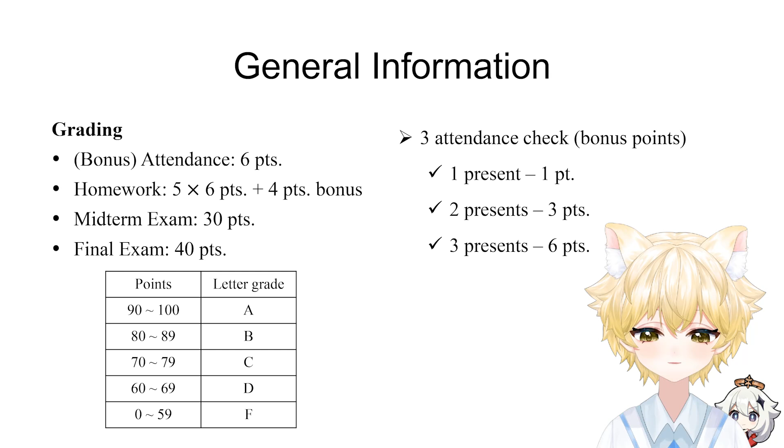Well, let me tell you. In my experience, students who attend class regularly typically perform significantly better on exams. Plus, there's valuable material we discuss in class that isn't in the textbook.

There will be 6 homework assignments, each worth 6 points. Your lowest homework grade will be dropped, meaning that effectively there are 5 assignments. The policy is designed to give you flexibility and room to improve.

Well-typed homework submission earns a 1-point bonus per assignment, up to a maximum of 4 bonus points. This is intentional. Students are expected to communicate technical work clearly and professionally, and learning to type-set equations is a valuable long-term skill.

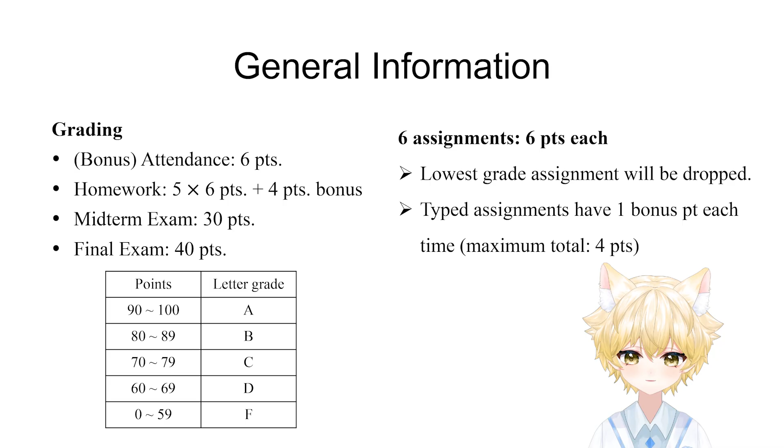There will be a midterm exam and a final exam, both in class and closed book. You are allowed 1 letter-sized equation sheet, double-sided. Copying homework solutions onto the equation sheet is prohibited. The equation sheet is meant to support understanding, not to replace your understanding.

Well, the final grades are assigned based on absolute thresholds. Although we may curve the midterm and final exam scores, the total score will not be curved. If everyone earns an A, everyone receives an A. The grading scale is transparent, and success is achievable with constant effort.

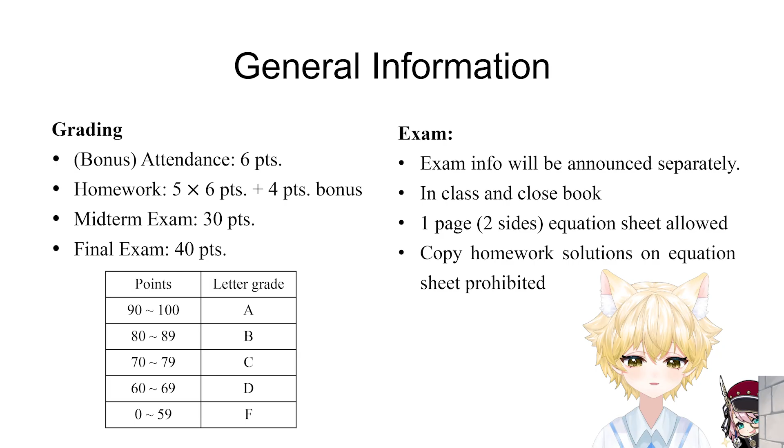You are permitted to use generative AI tools to clarify concepts, review materials, or explore alternative explanations. However, using AI to complete homework or submitting AI-generated work as your own is strictly prohibited and constitutes academic misconduct. Think of AI as a learning aid, not a decision maker. Engineering requires judgment, and judgment cannot be outsourced.

Over-reliance on AI without understanding will harm your exam performance and your ability to apply mechanics in real situations.

Before moving on, let me briefly go over the course principles, because they define how we learn and how we maintain fairness in this class.

Discussion on homework problems and lecture notes is strongly encouraged. Talking through ideas, asking questions, and helping each other understand concepts are all part of effective learning. However, the exchange of written solutions or completed work is not permitted. Your submitted work must always reflect your own understanding.

Unless prior approval is granted, late assignments will receive a 30% penalty. In addition, assignments submitted after solutions have been posted will not be accepted. Also, unless approval is granted, no makeup exams will be given. Exams are designed to assess individual understanding at a specific point in time, and maintaining uniform conditions is essential.

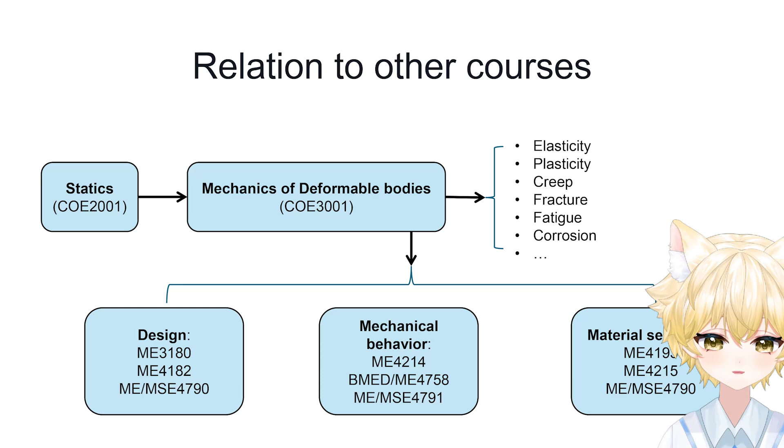COE 3001 sits between statics and more advanced courses such as machine design, elasticity, plasticity, fracture mechanics, and fatigue. Statics taught you how to compute forces. This course teaches you how those forces deform materials. Later courses will build on this foundation to study more complex material behavior and failure mechanisms.

The structure of this course follows a deliberate progression. We begin with axial members, or bars, subject to tension and compression. These problems are conceptually simple and allow us to introduce stress, strain, and constitutive relations. We then move to shafts under torsion, where rotational deformation becomes important. Next, we study beams under bending, which form the backbone of most structural systems. Finally, we examine columns and buckling, where stability rather than strength governs failure.

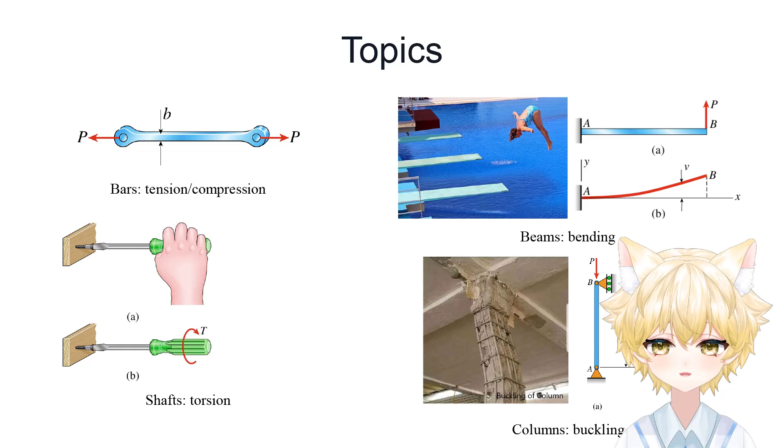The course starts with basic deformation modes such as tension, compression, shear, bending, and torsion. From there, we learn how to compute the internal forces inside a structure, and then translate these internal forces into stresses. Once we understand stress, the course naturally branches into three major directions.

One branch focuses on strength, asking whether a structure will fail. Another focuses on stiffness, asking whether the deformation is acceptable. The third focuses on stability, asking whether the structure can suddenly lose equilibrium, such as through buckling.

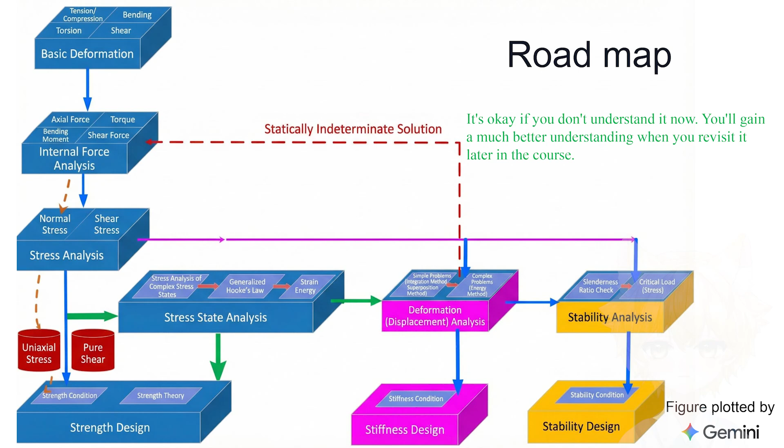Although the topics in the course are connected, some problems can be solved using simple methods early on, while others require more advanced tools that we will develop later. That is why you may see arrows that go forward then come back. For now, you should think of this figure as a map, not a checklist. As we move through the semester, we will revisit this diagram many times, and each time more of it will start to make sense.

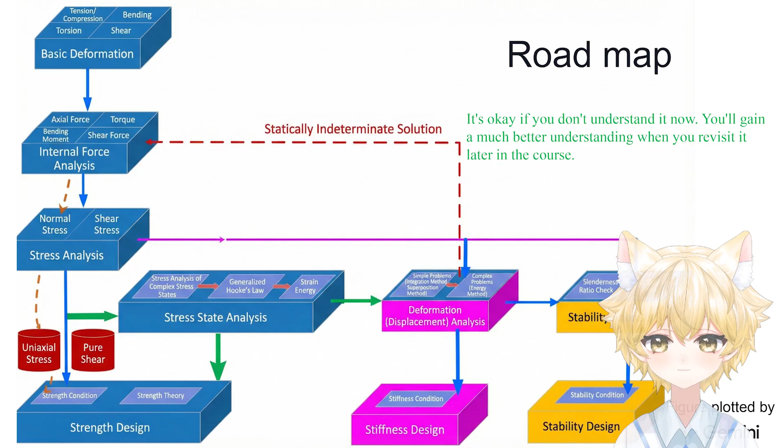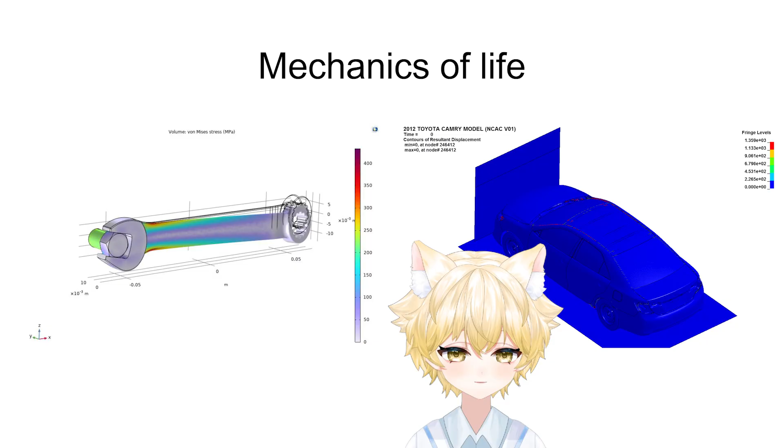Towards the very end of the course, we will briefly introduce commercial engineering software, just to give you a first impression of a numerical simulation in practice. The images on these slides are examples of what such software can do - for example, predicting stress distributions, deformation, and overall structural response in real components and full systems. The purpose is simply to help you connect what you learn analytically in this class with how mechanics is applied in real engineering workflows. Think of this as a preview, not a requirement. For now, we will move on and focus on the fundamentals.

The mechanics of materials is the hidden backbone of civilization. I want to share some stories that illustrate the critical importance of mechanics and materials.

The Saturn V rocket, which carried astronauts to the moon, experienced enormous mechanical loads. Its structure endured compression from its own weight, tension from engine thrust, bending from aerodynamic forces, and torsion from control systems. The primary challenge was not material strength alone, but structural stiffness and stability. Thin-walled shells had to be light enough to fly, yet stiff enough to avoid buckling.

At the opposite extreme is the bathyscaphe Trieste, which descended to the deepest point in the ocean.

Its spherical steel pressure hull was designed to withstand approximately 110 megapascals of external water pressure. The spherical geometry ensured uniform compressive stress, demonstrating how geometry can be just as important as material selection.

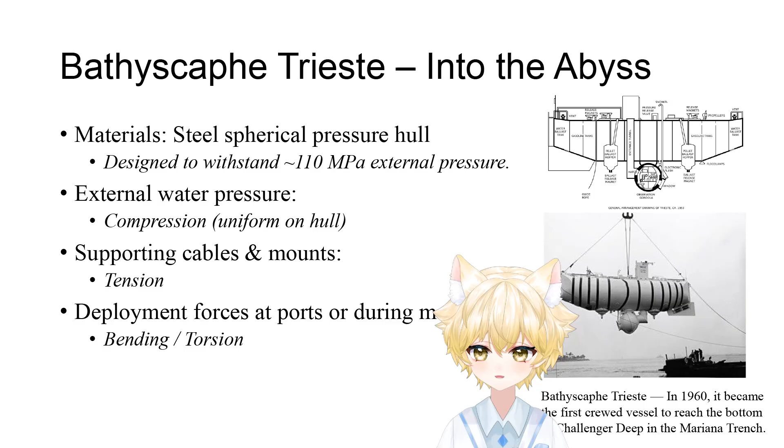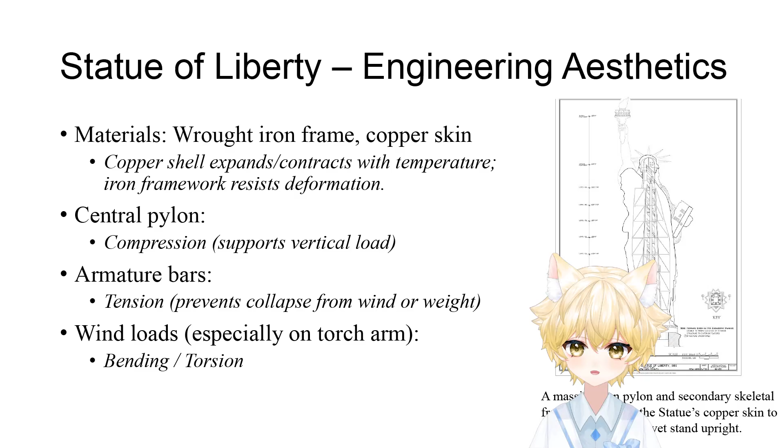The Statue of Liberty presents another fascinating case. Its wrought iron frame supports the copper skin. Here's the clever part: the copper shell expands and contracts with temperature changes, while the iron framework resists deformation. The central pylon handles compression. To support the vertical load, armature bars provide tension to prevent collapse from wind or weight, and the wind loads, especially on the torch arm, create bending and torsion forces. This engineering solution allows the copper skin to move independently while keeping the statue standing upright. Without understanding these deformation principles, Lady Liberty might have collapsed long ago.

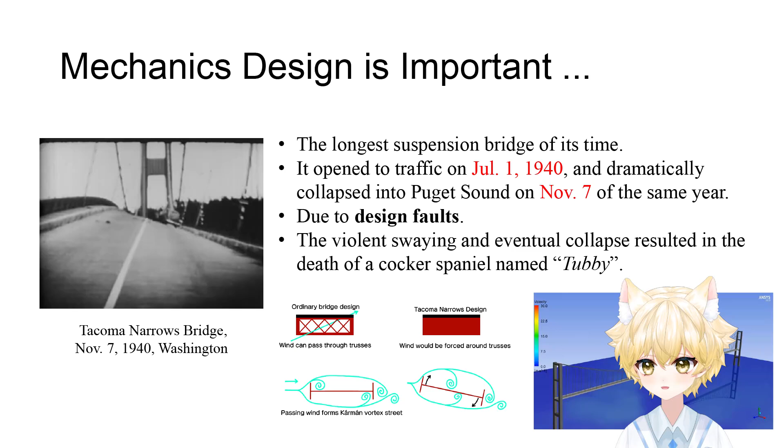Now let's look at what happens when we get it wrong. The Tacoma Narrows Bridge, which opened on July 1, 1940, dramatically collapsed into Puget Sound just 4 months later on November 7th. At the time, it was the longest suspension bridge of its time. The collapse resulted from design faults that didn't properly account for aerodynamic forces and the bridge's natural frequency. The violent swaying and eventual collapse tragically resulted in the death of a Cocker Spaniel named Tubby. This incident revolutionized bridge design and taught engineers critical lessons about resonance and structural dynamics.

Similarly, Aloha Airlines Flight 243 in 1988 suffered catastrophic failure due to fatigue cracks and poor maintenance. A large section of the roof tore off mid-flight, consisting of the entire top half of the aircraft skin from behind the cockpit to the fore-wing area. This explosive decompression resulted in one fatality, flight attendant Clarabelle C.B. Lansing, who was ejected from the plane, and injured 65 others. This tragedy highlighted the importance of understanding fatigue failure in materials.

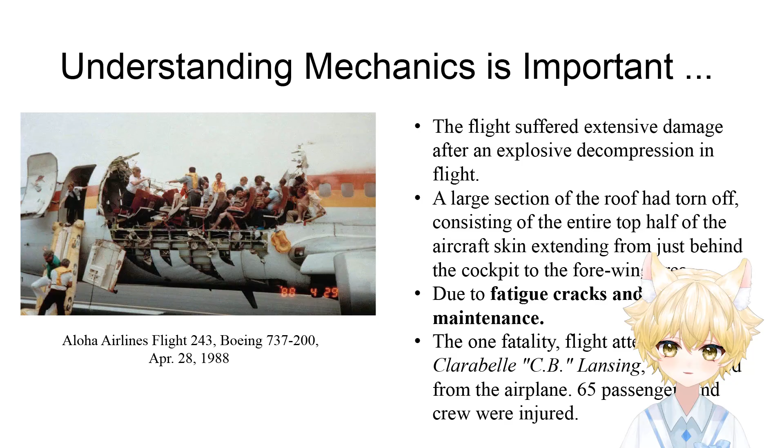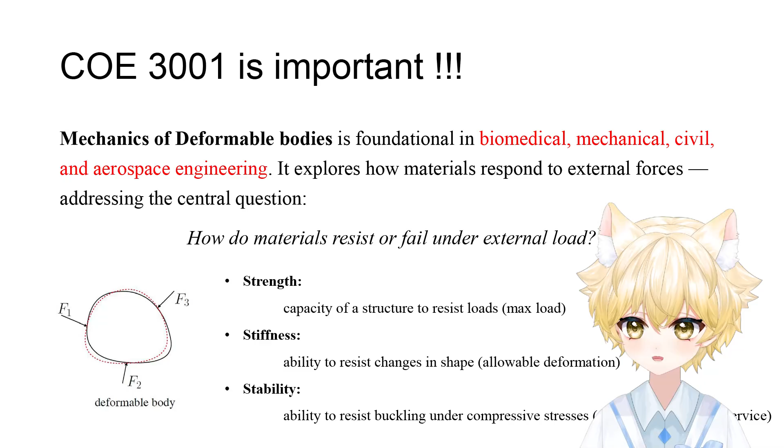These examples aren't just history lessons. They are powerful reminders of why COE 3001 matters. Mechanics of deformable bodies is foundational across biomedical, mechanical, civil, and aerospace engineering. It explores how materials respond to external forces, addressing the central question: how do materials resist or fail under external load? This brings us back to the three critical properties of this course: strength, the capacity of a structure to resist loads; stiffness, the ability to resist changes in shape; stability, the ability to resist buckling under compressive stresses.

Now let's get into the technical part of our course. In statics, you worked primarily with rigid bodies, but in the real world everything deforms under load. That's where deformable bodies comes in. A rigid body is an idealized model. It is assumed to sustain unbounded load without any changes in shape or size. No matter how large the applied forces are, the geometry of the body remains unchanged. Because of this assumption, rigid body mechanics focus only on overall loading, kinematics, and dynamics, without concern for internal deformation. This is the framework you primarily used in COE 2001, statics.

In contrast, a deformable body is a more realistic representation of real materials. For deformable bodies, an upper bound on load exists. When forces are applied, the body experiences change in shape and size. These deformations may be small or large, but they cannot be ignored. As a result, deformable body mechanics cares not only about equilibrium, but also about how the structure deforms during or due to loading.

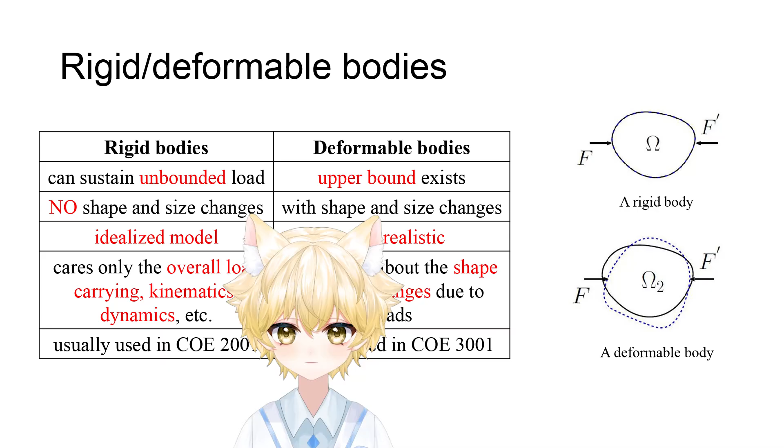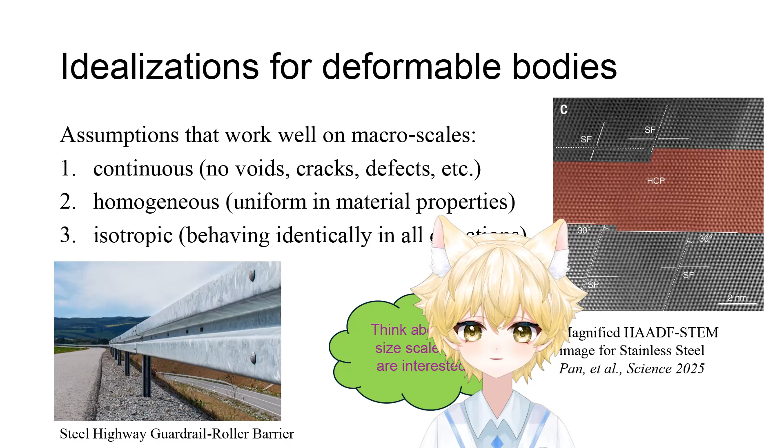To analyze deformable bodies, we rely on several idealizations that work well at the macroscopic scale. First, we assume materials are continuous, meaning we ignore voids, cracks, and defects. Second, we assume materials are homogeneous, with uniform properties throughout the body. Third, we often assume materials are isotropic, behaving identically in all directions. These assumptions are not strictly true at the microscopic or atomic scale, as shown in the image on the right. However, when we study engineering scale structures such as beams and columns, this idealization provides accurate and practical results. The key idea is to always think about the length scale you are interested in. At the scale of this course, these assumptions are both reasonable and extremely useful.

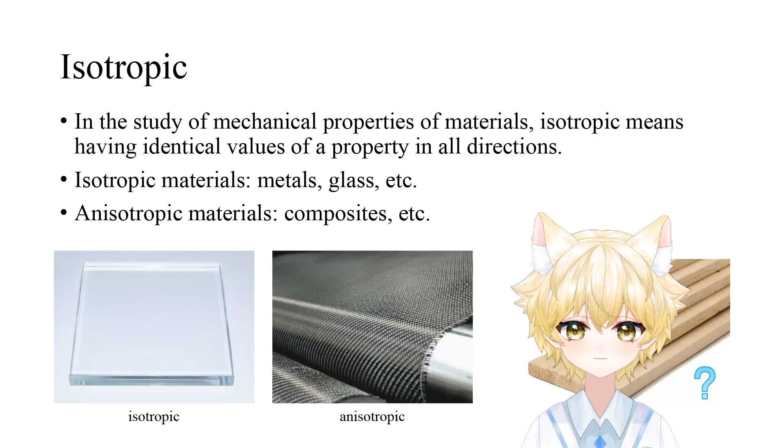Before we can analyze deformations, we need a common language, and the language is mathematics. Let's review some fundamental concepts. First, units. In this course, we will use SI units consistently. That means length is measured in meters, mass in kilograms, force in newtons, moments in newton meters, and energy in joules. You may be familiar with US customary units from previous courses, but for this class, all analysis and final answers are recommended to be expressed in SI units. Using a single, consistent unit system helps avoid mistakes and makes equations easier to interpret. Unit conversion is your responsibility, so please pay close attention to units throughout your calculations.

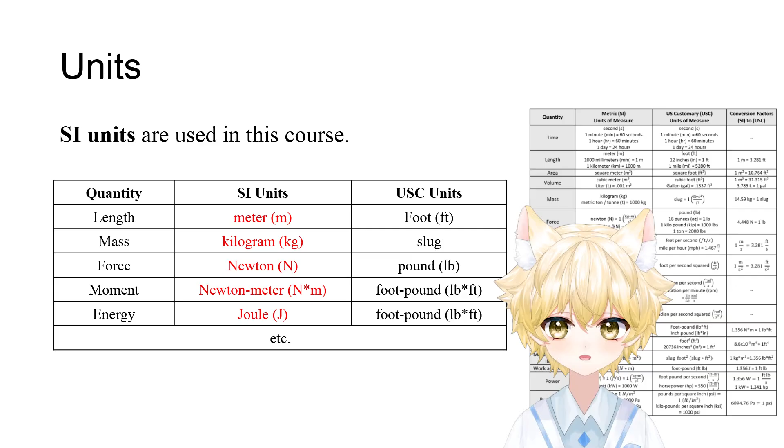Because real engineering loads are either very huge or very small, we rarely talk in original SI units. We use prefixes, and you need to be fluent in them. Based on my experience, rounding prefixes during calculation can lead to serious errors in the results, especially when dealing with square roots.

Here are some examples. Kilo, that is 10 to the power of 3. We often measure force in kilonewtons, right? Second, mega, the capital M, that is 10 to the power of 6. This is standard for stress. If you calculate stress, it will most always be in megapascal.

The third one, giga, the capital G, right? This is 10 to the power of 9. This is huge. We usually use this for modulus because metals are incredibly stiff. Here is my advice: always pay attention to prefixes, because a small mistake can lead to errors of several orders of magnitude.

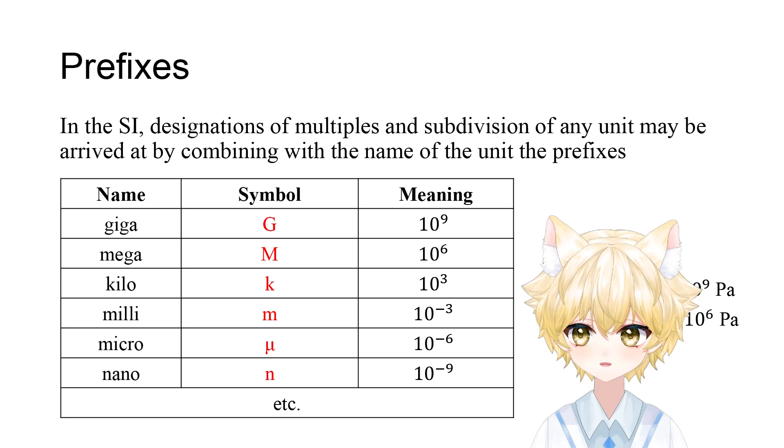Okay, then we go to scalars and vectors. A scalar is a quantity that has magnitude only. Examples include mass, time, temperature, and energy. Scalars do not have a direction, so they can be described by a single number with units.

A vector, on the other hand, has both magnitude and direction. Common examples in mechanics include force, velocity, displacement, and acceleration. Because direction matters, vectors cannot be treated as ordinary numbers. Vectors are often expressed in component form, such as using i and j in 2 dimensions. Vector addition is performed by adding components, which corresponds to placing 2 vectors head to tail connected.

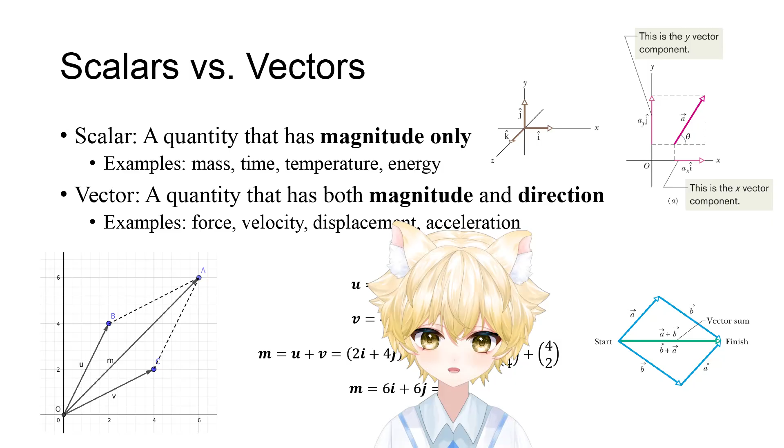Throughout this course, we will work extensively with vectors, since most mechanical quantities depend not only on how large they are, but also on the direction in which they act. For example, the most common one is force, right? We always care about the direction of force. Understanding vector operations is essential for our work.

In mechanics, there are 2 common ways to multiply vectors, the dot product and the cross product. The dot product measures how much one vector acts along the direction of another. It is defined as A dot B equals AB cosine phi, which can be interpreted as the magnitude of A projected onto B, multiplied by the magnitude of B. In component form, the dot product is simply the sum of the products of corresponding components.

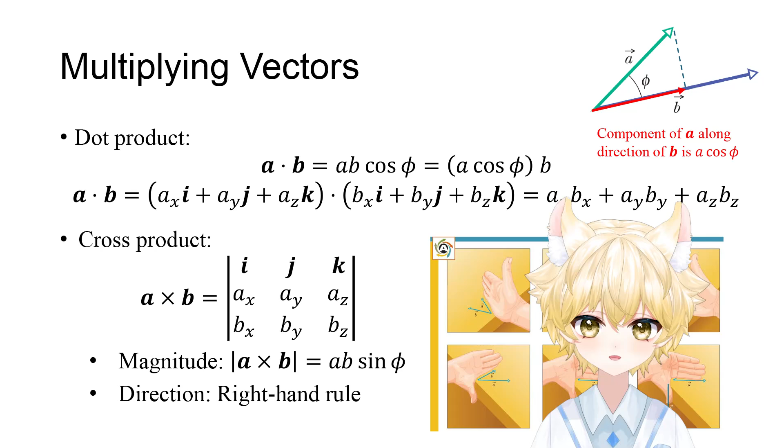The cross product, in contrast, produces a new vector that is perpendicular to both input vectors. Its magnitude is AB sine phi, and the direction is determined by the right-hand rule. In this course, the dot product is commonly used to compute components of force and stresses, while the cross product is essential for analyzing moments and torques.

In mechanics of deformable bodies, derivatives and differential equations are essential tools, not abstract mathematics. A derivative describes a rate of change. Geometrically, it represents the slope of a curve. Physically, it tells us how a quantity varies with position or time.

For example, in structural mechanics, derivatives of displacement describe slope, curvature, and strain. When we analyze real structures, quantities such as stress, strain, and displacement vary continuously along a body. This naturally leads to differential equations, which relate external loads to internal response. Most problems in this course are boundary value problems, where conditions are specified at supports or boundaries, rather than at a single point. Understanding derivatives and differential equations allows us to connect loads, material properties, and geometry to the resulting deformation.

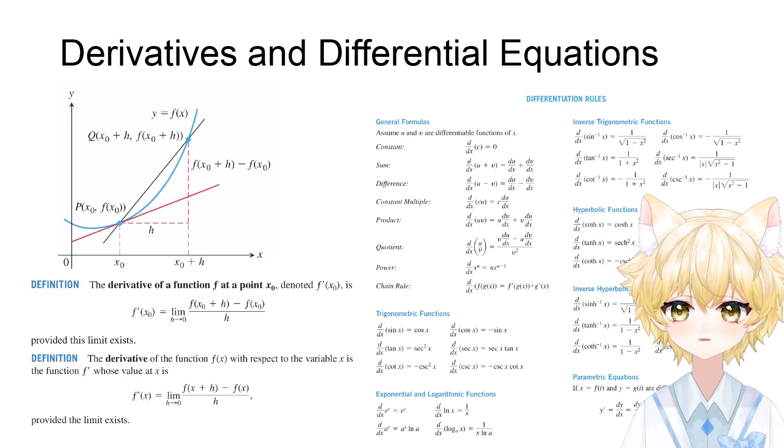You don't need to memorize every formula on these slides. What matters is recognizing that calculus is the language we use to describe how structures deform. Here is a simple reminder of what we mean by a differential equation. A first-order differential equation relates a function to its first derivative, usually written as dy/dx equals f(x,y), right? You may also see this written as y prime equals f(x,y).

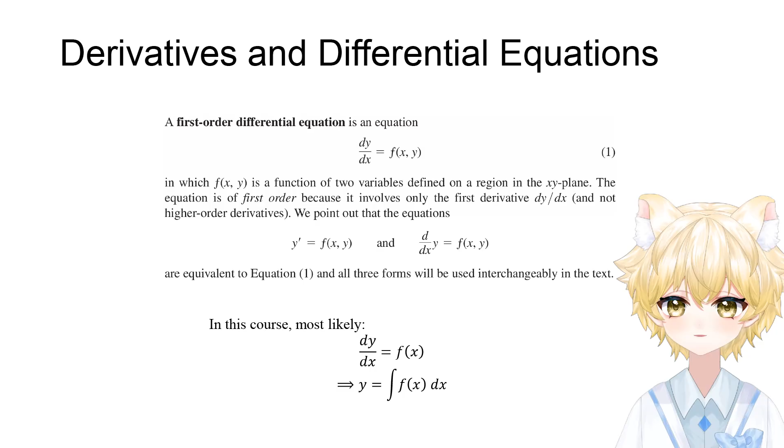These forms are completely equivalent. In this course, however, we will most often deal with the simpler case where the derivative depends only on the independent variable. For example, dy/dx equals f(x). In that case, the solution is obtained by integration. The key takeaway is not the notation, but the idea: differential equations allow us to describe how physical quantities vary continuously along a structure. This is exactly what we need in mechanics of deformable bodies.